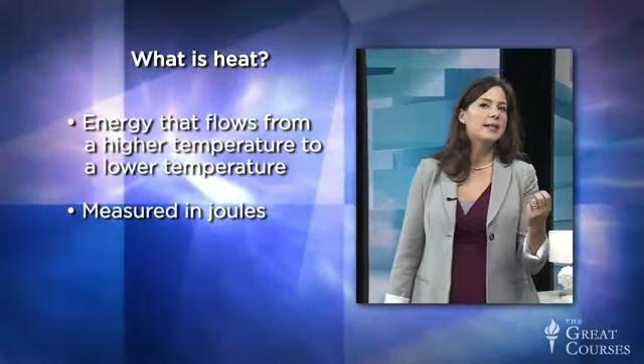What is heat? Heat is energy that flows from a higher temperature to a lower temperature, often across objects in contact with one another. We measure heat in joules. We don't say that an object contains heat—it has a particular energy, but unless the heat is moving from one place to another, it's not heat.

Heat moves from coffee in a mug to the mug itself, to our hands as we hold it. Now, when the temperature of an object stays steady and there is no net flow of heat from one area to another, we say that the object has reached thermal equilibrium.

But how do we measure the temperature of an object? Well, here we have the application of what's called the 0th law of thermodynamics. It's called the 0th law because the first and second laws were stated first in the 1850s. It wasn't until the 1930s that the 0th law got its name. But it's the simplest of the laws and hence precedes the others.

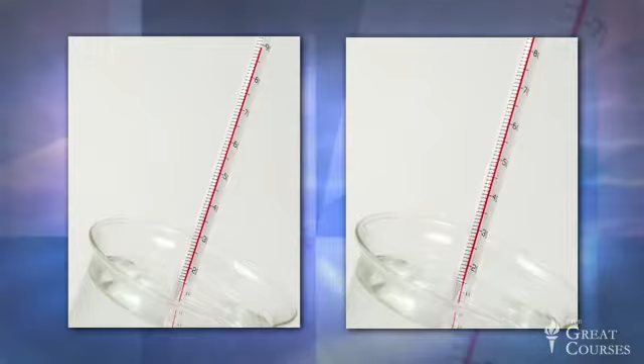The 0th law states that if two bodies are independently in thermal equilibrium with a third body, they are in equilibrium with each other. That is, if you put a thermometer in 2 glasses of water and it reads the same temperature, then the 2 glasses of water are equally hot. Simply put, all heat is of the same kind. Sounds pretty simple, and it is, but it's an important assumption that we make so that we can use a thermometer to measure temperature and therefore predict the flow of heat.

Why do ice cubes keep drinks cool, even after the cubes and the liquid are at thermal equilibrium, when the surroundings of the drink, such as the room, is at a higher temperature? Because the heat in the surroundings or the room is being used to do the work of melting the cubes, not to raise the temperature of the liquid. The liquid's temperature will only rise once the cubes are melted. Here you have the 3 bodies of the 0th law: the ice, the water, and the room.

So now that we've covered the 0th law, let's jump right to the most closely related law, which is the 3rd law of thermodynamics. This law was formulated after the first and second laws, and so it's called the 3rd. But for our purposes, it's more convenient to discuss it now since it's most closely related to the 0th law. The 3rd law states that it's impossible to reach a temperature of absolute 0.

Let's unpack this one. First, what's absolute 0? Well, simply put, it's the coldest possible temperature. How do we know what the coldest temperature is? Because it represents the edge of what's physically possible. At absolute 0, all molecular motion stops.

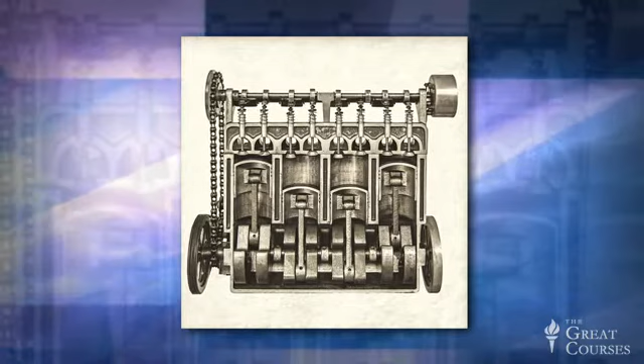We know then that a car's engine is not ideal because heat escapes and because processes within the car cause friction which dissipates energy. Now note that the opposite isn't true. A reversible engine may not be maximally efficient. The law only goes in one direction.

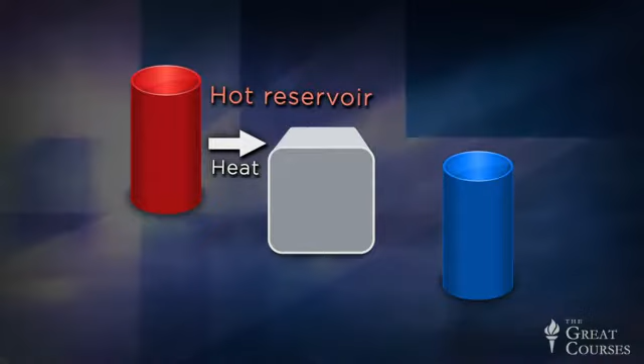Perhaps the best way to imagine a Carnot engine is to think of a system in which heat comes from a hot reservoir, powers the engine, and then rejected or unused heat flows into a cold reservoir. The engine itself has some unique features: there's no friction, so no energy dissipates that way, and the hot side of the engine is the same temperature as the hot reservoir, while the cold side of the engine is the same temperature as the cold reservoir.

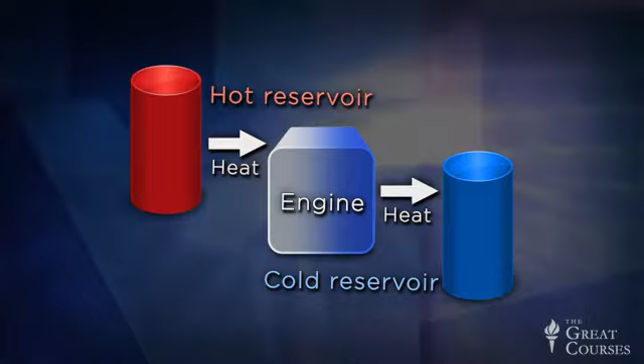Now, when you think about it, a refrigerator is just a basic Carnot engine with all the arrows pointing in reverse directions. Work goes in to power the engine, which in turn draws heat from the cold reservoir and sends it to the hot reservoir. So the cold reservoir is the inside of the fridge and the hot reservoir is somewhere outside of it. Carnot's principle also demonstrates why you can't cool your kitchen by leaving open your fridge door—you'd have to somehow have the heat dissipate outside of the room.

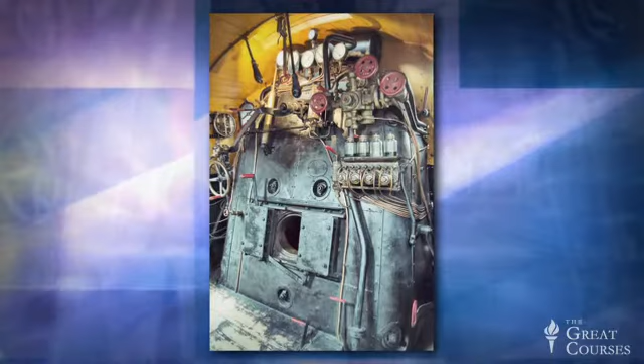In order to understand how the laws of thermodynamics enable us to power our lives, it's useful to concentrate on two types of engines that are perhaps the most famous examples in thermodynamics: the steam engine in old trains and ships, which is an external combustion engine, and our car engines, or internal combustion engines. Let's start with steam engines, since they were the first to be widely used, and improvements to the steam engine ushered in the Industrial Revolution. They didn't just power boats and trains, they were also responsible for powering many factories.

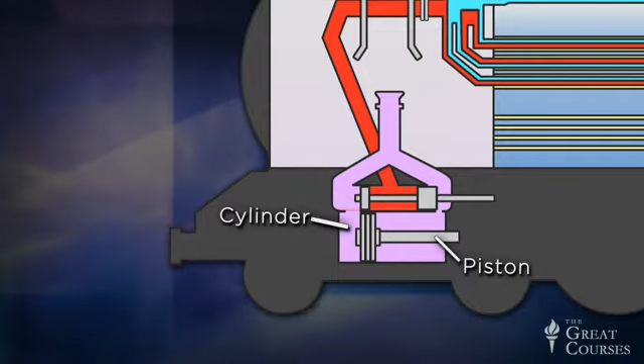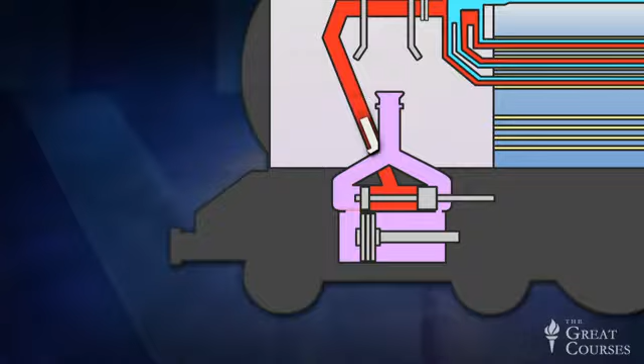So what are the major components of a steam engine? First, you need a piston attached to a rod and placed inside a cylinder. The movement of this piston is what moves the train, boat, or whatever forward. What causes the piston to move is the hot air in the form of steam. So then you need a place for the excess steam to exit and a place for the high-pressure steam to come in. You also need a way to heat up the steam.

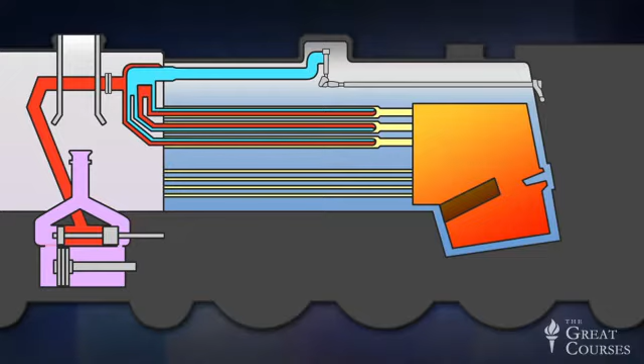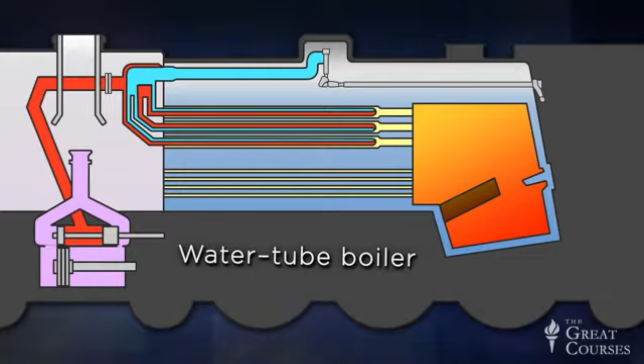You need a boiler. A boiler is simply a furnace that heats up the water. There are two main types: in a fire tube boiler, pipes run hot gases from the fire through a vat of water, whereas in a water tube boiler, more common these days, the hot gases heat a series of tubes of water.

The steam leaving the boiler is at a very high pressure, and when the engineer opens a valve to let that steam travel down to the piston chamber, it causes the piston to move in one direction. There is another valve attached to the piston chamber that moves when the piston is all the way at the other end of the chamber.

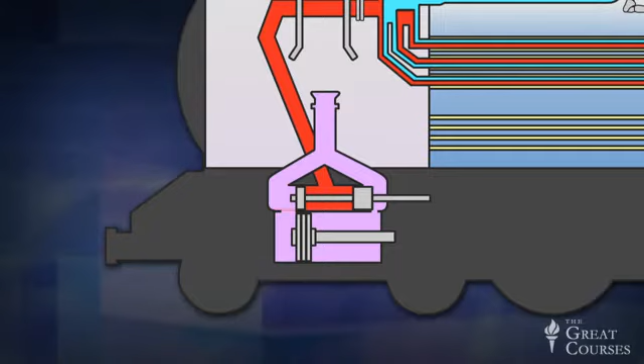When that valve moves in the opposite direction, it lets out excess steam, which causes the piston to move back to its original position. This way, the pressure from the steam moves the piston forward and the valve moves it back. This is why excess steam is let out of the chimney, and also why trains make the choo-choo sound—as the steam escapes, it goes choo.

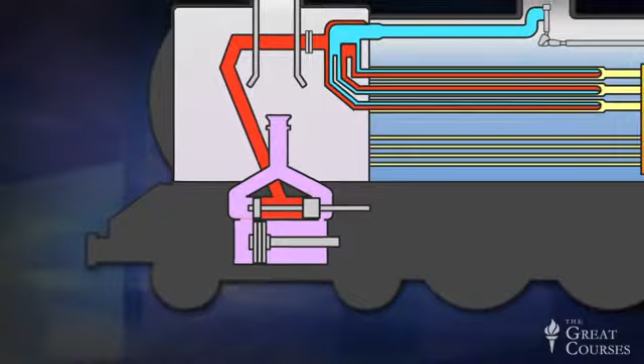When the train is first leaving the station, its pistons are moving slowly, but eventually they speed up and we hear choo, choo, choo, choo. As the laws of thermodynamics state, heat is used to do work. The steam from the boiler eventually moves the train forward.

In a steamboat, the pistons are attached to a paddle wheel rather than the wheels of a train, but the same general principles apply. Steam engines are external combustion engines because the combustion that generates the heat that creates the work occurs outside of the engine itself.

Internal combustion engines are much more efficient and therefore can be a lot smaller, making them ideal for vehicles such as cars. The inventors of the internal combustion engine noticed that much of the potential energy in the furnace that heats the water in a steam engine is wasted.

Instead, if you ignite even a small amount of fuel in an enclosed space, a very large amount of energy is released, and you can use that energy to put something else in motion. Once again, heat is used to create work. That's the fundamental principle underlying a car engine. Let's get to the details.

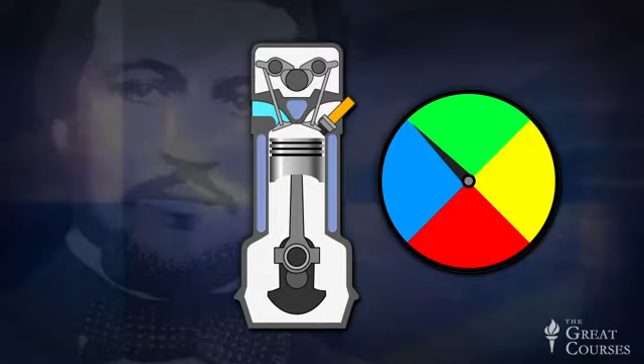In 1876, a man by the name of Nicholas Otto invented the four-stroke combustion cycle to convert gasoline into motion. The strokes refer to the movement of the piston up and down the cylinder, which goes through four strokes in each cycle. The first one is the intake stroke.

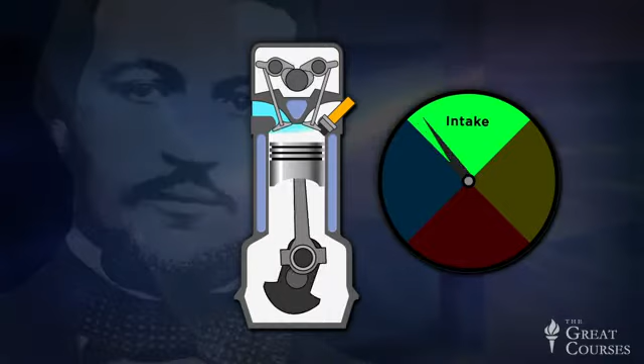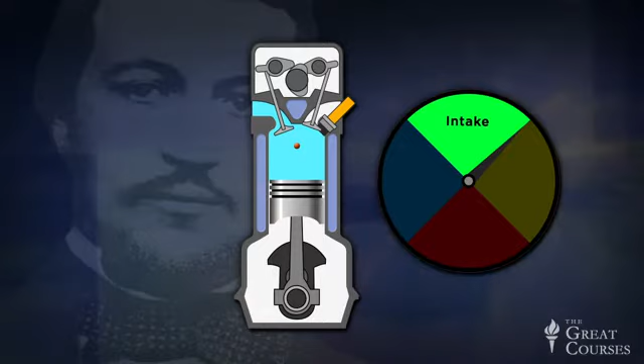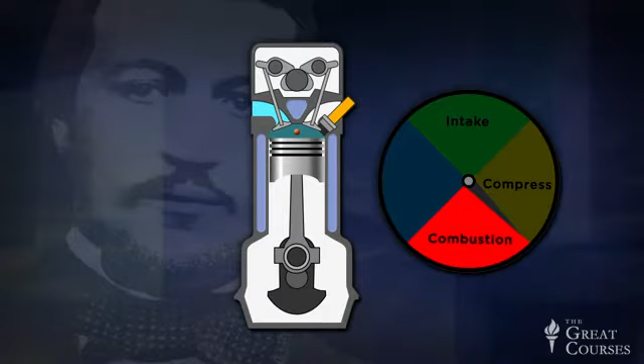The piston moves downward to let the engine take in a cylinder volume of air and a tiny amount of gasoline. Then, during the second stroke, the piston moves back up to compress the fuel-air mixture, ensuring that the explosion will be more powerful. At the top of the third stroke, the combustion stroke, a spark plug emits a spark

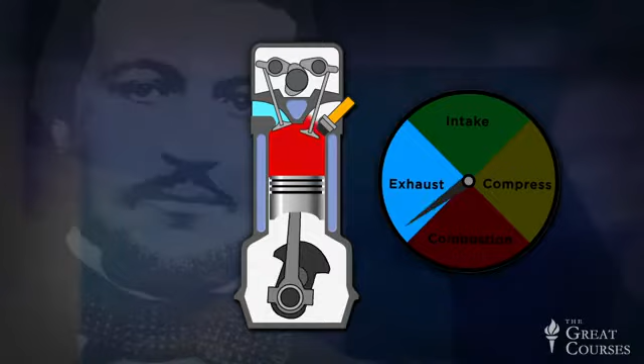which ignites the fuel and drives the piston down. Then the fourth stroke opens the exhaust valve so that the exhaust can leave the cylinder and go out the tailpipe. So we see how a combustion engine uses the principles of thermodynamics to move a car forward. Gasoline is converted into motion.

But there's another type of engine that's far more powerful. Thermodynamics on steroids, if you will. The turbofan engine, a type of gas turbine that powers commercial jets. And so to understand how thermodynamics can scale up, we turn to turbine engines.

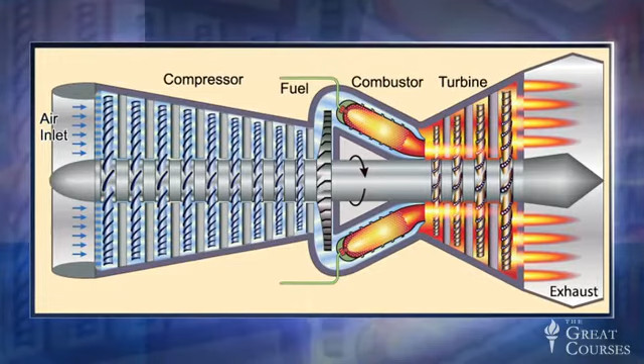Besides gas turbines, there are three other main types of turbine engines: steam turbines, water turbines, and wind turbines. You're probably somewhat familiar with all of these. Coal, natural gas, and nuclear power plants all create steam and run it through a massive turbine to spin some kind of shaft that drives an electricity generator. A turbine is a mechanical device that rotates and extracts energy from the steam to move the shaft.

Hydroelectric plants use water to power the turbine, while wind turbines are, of course, moved by the wind. Now, in a gas turbine, essentially the same concept applies. A pressurized gas spins the turbine, which creates work and drives some component. In a jet engine, heat from burning jet fuel expands air, and this fast-moving hot air spins the turbine, which

we see under the wings in commercial airliners. Why use jet fuel? Undoubtedly, it's expensive, which is why many flights these days seem to take longer than they used to 10 years ago. The commercial airlines are saving costs by using less jet fuel on longer flights.

But the amount of power that you get in a jet engine for its weight compared to a traditional engine is much greater. Gas turbine engines are also much smaller than other engines.

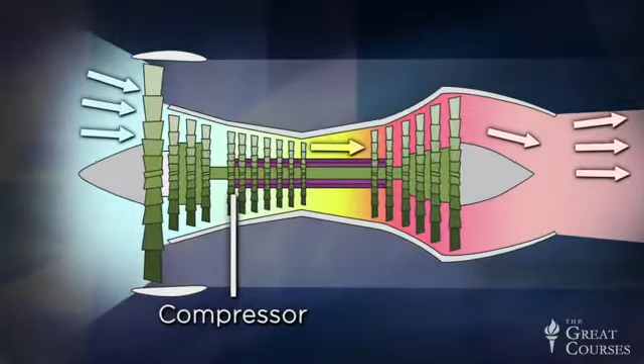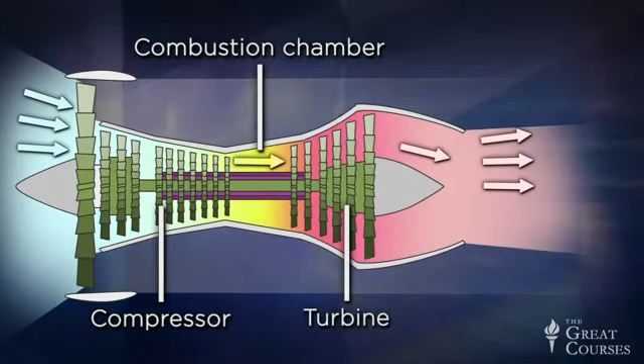A gas turbine starts with a rotating device with spokes that takes in outside air and compresses it, sending it to the combustion chamber behind it. There, the fuel is burned, and then the turbine, located behind the combustion chamber, extracts the pressurized, fast-moving gases and

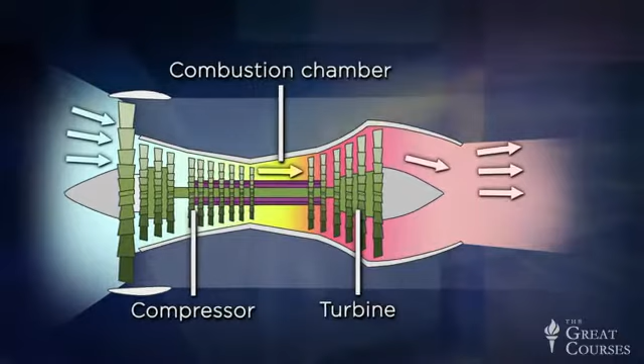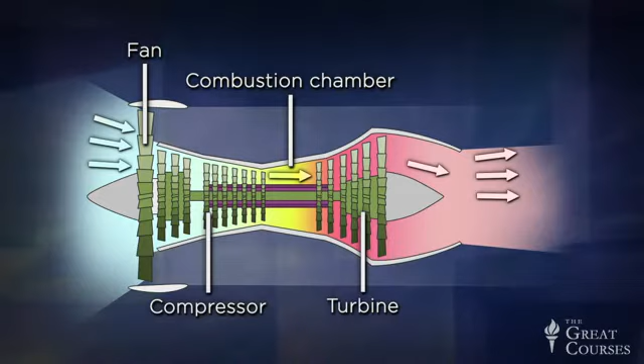moves the output shaft. In a turbofan engine, the shaft is connected back to the front of the engine, where it powers a big fan, the blades that you see when you look at the front of a jet. This fan dramatically increases the amount of air moving through the engine and increases its thrust, a concept we'll be covering in the upcoming lectures on fluid mechanics. It's the thrust that moves the airplane forward, but we'll get to that later.

In all of these examples, the laws of thermodynamics are applied to turn heat into work and to keep us moving. But there are other uses for thermodynamics, including helping us understand and predict the effects of climate change on our planet.

In 2005, Hurricane Katrina ripped through the Gulf of Mexico and became one of the costliest natural disasters in U.S. history. More than 1,800 people died as a result of the storm, and property damage has been tallied at a whopping $81 billion. Another costly storm, Hurricane Sandy, hit the Atlantic coast in 2012, causing more than $68 billion in damage and killing 286 people.

Whether human activities that cause global warming have also triggered an increase in the rate and size of hurricanes remains unclear, but the odds are not in our favor. What's very clear is that flood insurance and other costs associated with owning property in the path of hurricanes is most definitely increasing. If we follow the money, there is clearly something going on.

In the context of thermodynamics, hurricanes are particularly interesting because they are said to represent almost perfectly efficient Carnot engines. Unlike our cars and ships and jets, hurricanes waste very little energy. A car is thought to function at about 25% efficiency. Much of the heat in the engine is lost, which we can experience by placing a hand on a running engine. Don't try this at home, because many parts of the engine will burn your hand to a crisp since so much heat is being lost.

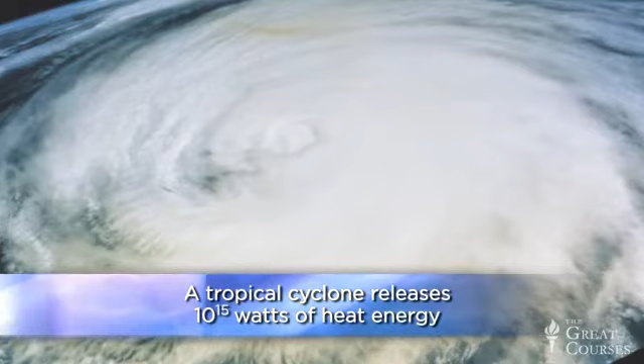But a hurricane transforms heat into work much more efficiently, so much so that a tropical cyclone, of which hurricanes are one form, can release heat energy at a rate of 10 to the 15 watts. That's about 70 times the daily world energy consumption of all of humanity, 200 times the worldwide electrical generating capacity, or the equivalent of setting off a nuclear bomb every 20 minutes for the life of the storm.

This heat energy is turned into rain via condensation and into wind energy as the strong, swirling winds that cause the characteristic shape photographed by orbiting satellites. A cyclone gets its energy from the evaporation of water from the ocean's surface. This is why we only see Atlantic hurricanes at the end of summer, when the ocean is the warmest, and not at all near colder regions like Alaska and northern Canada.

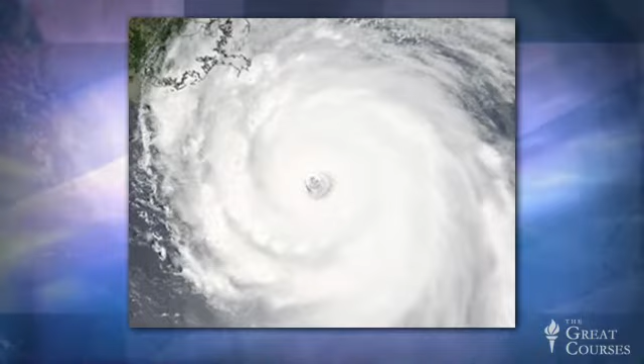In our Carnot version of a hurricane, heat from the oceanic reservoir flows into the eye of the hurricane, typically circular in shape, which can range from 3 kilometers, about 2 miles, to a whopping 370 kilometers, or 230 miles in diameter. In the eye of the hurricane, the weather is generally mild and cloud-free, though the ocean below is usually whipped into a frenzy.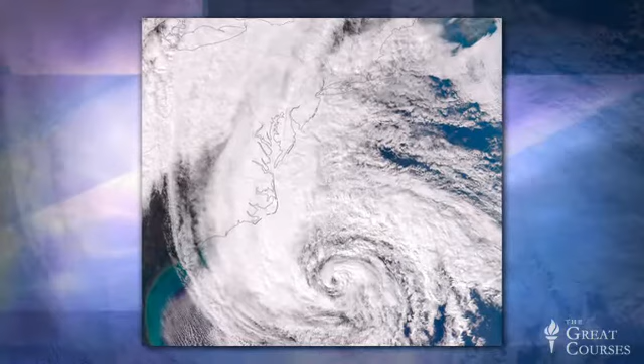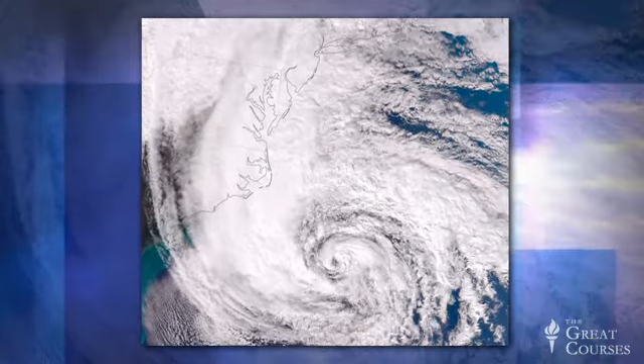Along the eye wall, or the sides of the eye, the latent heat from evaporation is turned into sensible heat. Latent heat means that it's hidden, in the sense that no temperature change is detected. The temperature change happens when the heat is turned into sensible heat during condensation, as the evaporated water now in the air condenses into rain as the air rises and cools.

The rotating pattern in the winds that is typical of cyclones is actually caused by the angular momentum of the Earth, known as the Coriolis force. This force is what causes hurricanes in the northern hemisphere to rotate counterclockwise, towards the north first, then west, and cyclones in the southern hemisphere to rotate in the opposite direction, clockwise, pulled south before being blown east.

Essentially, hurricanes take heat from the ocean, transfer it into rain and wind, and move it along their path of destruction. Once they hit land, they dissipate quickly because there is no more heat to feed them. But the devastation that they leave behind in the form of floods and winds is legendary.

It's not just humans that have learned to harness heat to power work. Mother Nature has sorted it all out far more effectively than anything that we've created. Time will soon tell if our man-made energy uses have given her more power in the form of global warming.

In 2006, the U.S. National Oceanic and Atmospheric Administration Geophysical Fluid Dynamics Lab predicted that, and I quote, 'the strongest hurricanes in the present climate may be upstaged by even more intense hurricanes over the next century as the Earth's climate is warmed by increasing levels of greenhouse gases in the atmosphere.'